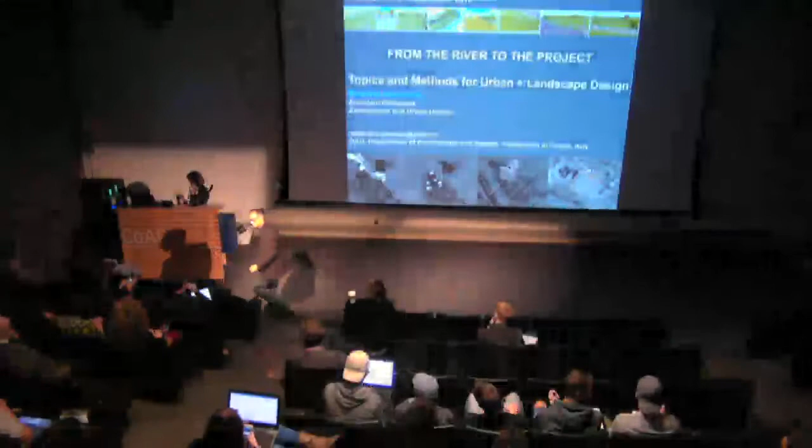So, thank you, Philip. No, he was joking, of course. I'm going to speak in English, but my English is not like yours, so I'm sorry about that. I will do my best, but it's going to be a little bit Italian style.

So he told you who I am and what I'm doing. Actually, in the last years, I'm working a lot on this topic about the riverbanks that I'm going to show you, and also on adaptive reuse and urban design.

I'm going to start with the contemporary issue. It means everybody's now thinking about what quality of living means, urban planning, architecture, recovering the social dimension of the territorial and architectural plans—and not to quote some Americans, but something that you know well, and it's coming back in Europe a lot.

I don't know here, but I'm studying now—I had a scholarship, and I'm studying in Pittsburgh at Carnegie Mellon University about what I saw until now, something very important for you too.

In Italy, because of quality of design, it's probably about how to control quality of design. It's very difficult and complicated because the definition of quality is something that's not possible to define.

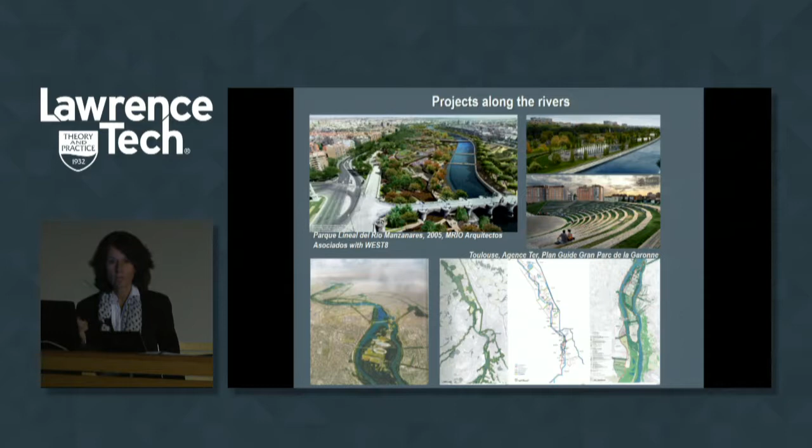One big example has been the park of the Ruhr in Germany, which in Europe is well known. This is a huge project that has been going on for like 20 years, transforming a region that was a huge industrial region. Now it's really improving and is even good for tourism - a lot of tourists are going there, and the landscape has changed a lot.

So the work I've done is in the region Piemonte. Where is the Piemonte region? There's some basic geography here, but I know it's different for you. We are just beside Milano, northwest, beside the River Po, our major river in Italy. Here's some pictures to show you how Torino is.

But Torino, the town itself, now has 900,000 inhabitants. The town, before, with Fiat, reached 1,100,000. But the metropolitan area is now more than 2 million people, and for us metropolitan area means all the small cities that are around Torino. You can see on the map just Torino, but with the metropolitan area.

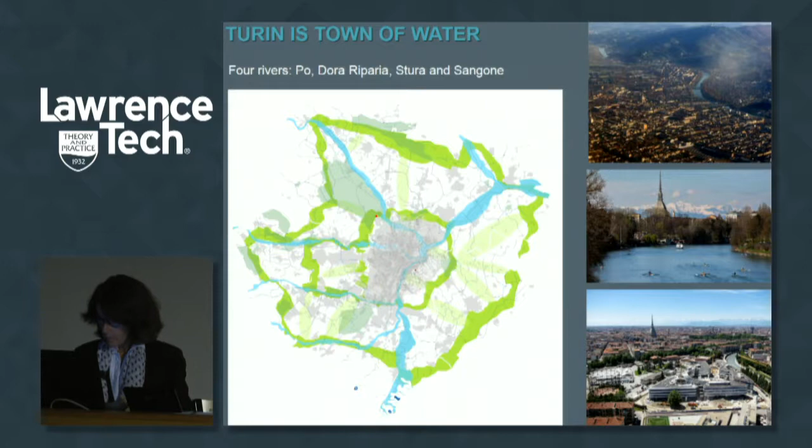This is the green system. What's important in Torino is that we have a whole story, I would say. We have a big system of parks, which you can see in the map, with these wonderful castles that were the king's place to go to hunt during their vacation.

On the top you can see Venaria Reale, which, in the last 20 years—you imagine Torino was considered an industrial town, so nobody cared about the heritage. It was not so important for us. Everybody came from the south of Italy to work.

So the Venaria Reale that you can see now, how is it? It's like not Versailles, but kind of, and it's really big with all the gardens restored and everything—it was abandoned. There was nothing there, nothing, closed. With that, we changed a lot.

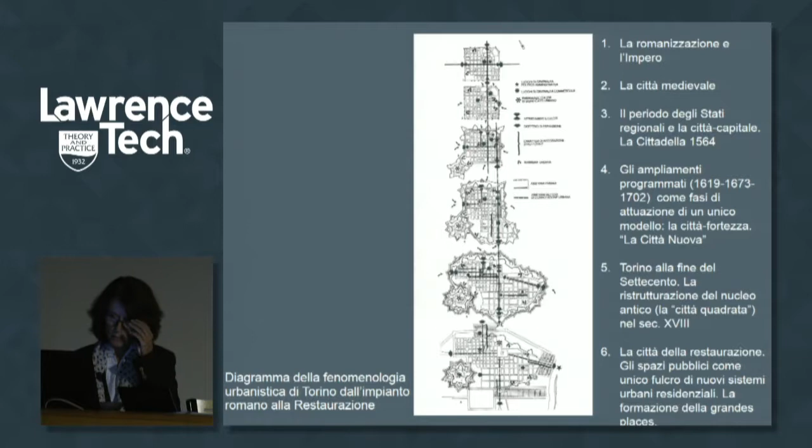The extension was programmed in 1619, and from then until the beginning of the 18th century, this became the new town Turin for the king. The king was the king of Piedmont and Savoy, part of France.

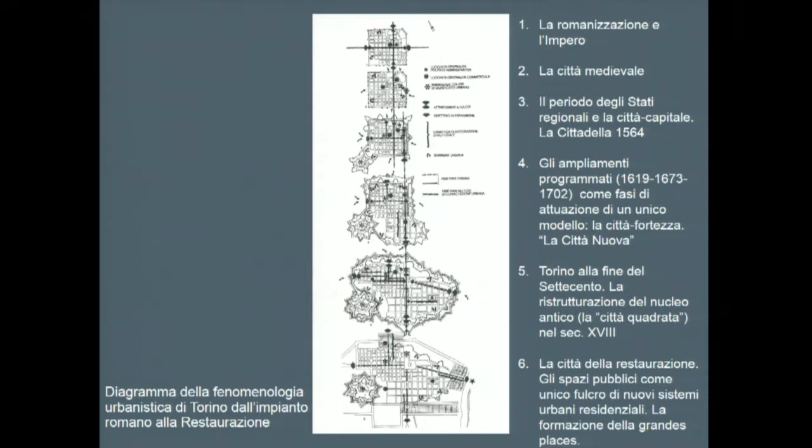But you can see the expansion of the city until the restoration time—that means after Napoleon. Napoleon came to Torino, so he destroyed all the fortifications, of course, like in all the towns in Europe.

This is the Baroque period, in which you can see the relation—the town was very small, and all the parks that you've seen in the other map are now close to the town, but they were far away, in the countryside.

This is an old map, just before Napoleon tore down all the fortifications, just to show the tissue of the city. And this is afterwards, at the end of the 19th century.

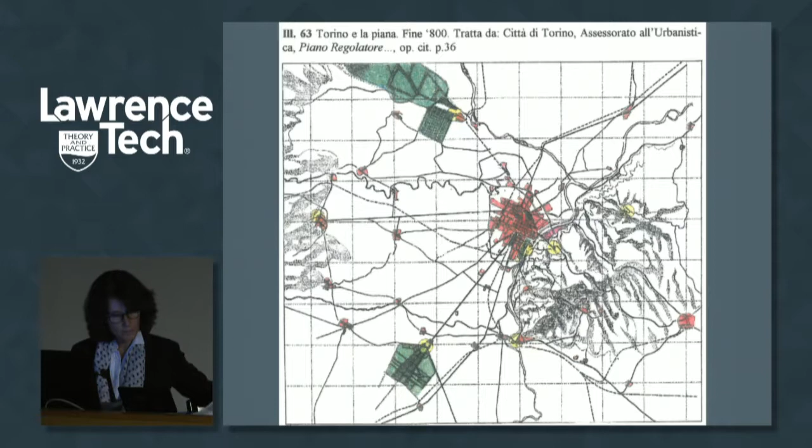Until here, not so many inhabitants, really—there were the nobles in Italy, of course, the monarchy and the king, a very nice town, but the Fiat changed it completely. You see the difference.

In 30 years, the city more than doubled, much more. A lot of industrialization all around the town, really huge—the city almost reached all the parks around.

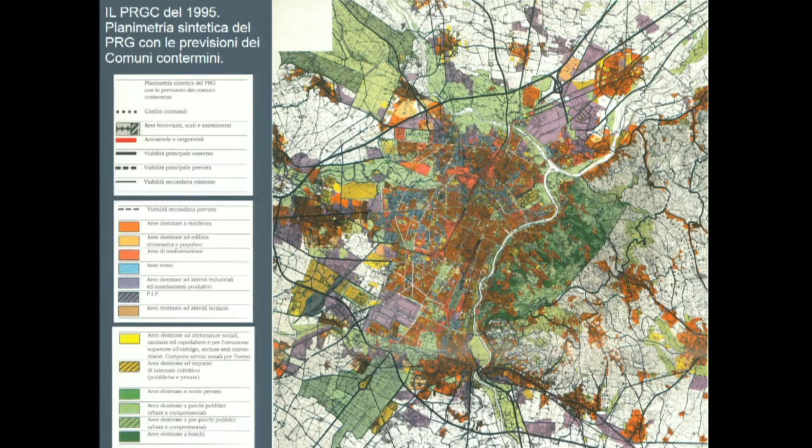Now, this is 1995, our comprehensive plan. In Italy, that's what I noticed here—by state law you're obliged to have a comprehensive plan. Every town has a comprehensive plan, and you have to change it after some years when it becomes old. This is the plan that was done by Gregotti and Cagnardi.

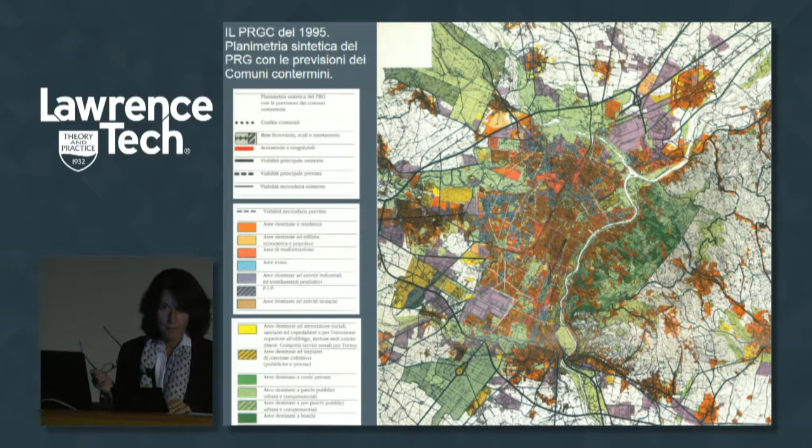Gregotti is known all around the world, especially in China in the last years, because he designed a lot of new towns there and things like that.

The plan means that all parts of the town have zoning. You know what zoning is, I think. But this is just the map seen from very far away; if you go in deep, you have all the land zoned with different zones, and not only that, special documents for each different part of the town for the transformation areas.

Of course, this is an old comprehensive plan. So now, at this moment, we have like 285, I think tomorrow perhaps more, variants of that. But not of all the comprehensive plan, just of part of it.

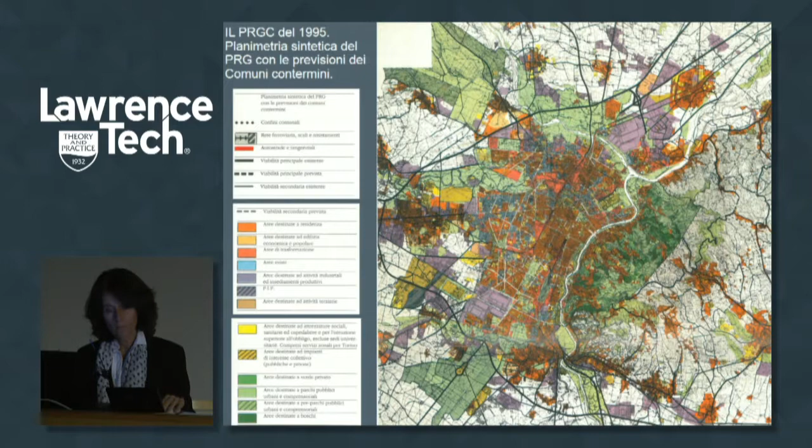This, I think, gives you an idea of where we are. So we were involved in this process of this research that at the beginning I wasn't sure it was so important for architects, but at the end I think it's been something very important.

We started with Sangone and after the Stura. With what? With a river agreement, or contract, if you take this word from France, because in France they have the contrat de rivière, as it's called, which is like a governance tool for shared landscape projects aimed at territorial negotiated governance.

What we did differently: this time there was an architect, not only planners, not only naturalists or things like that. So we tried to do something different.

Of course, this instrument is a tool for strategic water protection, mainly for that. But it was useful because it's a voluntary tool.

So what happened? Along the Sangone, we had 11 municipalities involved, and 2 institutional parks, and a lot of associations that had never been together talking to each other. With this, in a voluntary way, they said okay, let's sit, and we start to discuss.

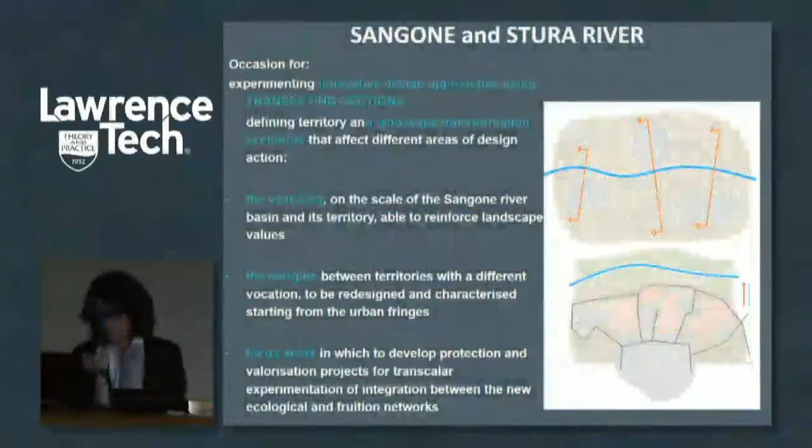And the focus area, that's an instrument—we really focus on some places. Usually when you work on a project studying a river, it's like along the river. No, we try to do something that crosses the river, linking the relation between one side and the other, and also to find some focus areas that were important. You can start with small projects, and after, this can affect a larger area.

So this was an opportunity to study some complex dynamics at landscape, urban, and architectural scale, and of course experimentation with the two scales we already discussed. This is just to explain how complicated it was.

This governance tool was promoted by the province of Turin, which has a provincial territorial plan. So we have a comprehensive plan, and after that, I don't know where it's going—we have a territorial plan at the province scale, but the law changed last year. We don't have provinces anymore. The biggest provinces in Italy were transformed into metropolitan areas, so the borders are not like they were before.

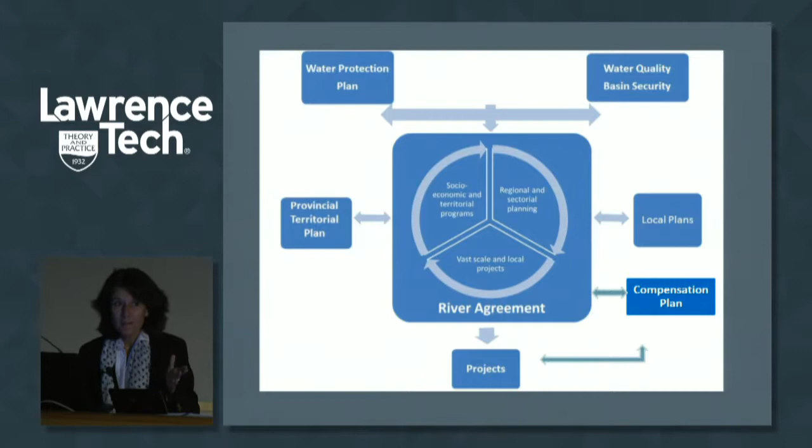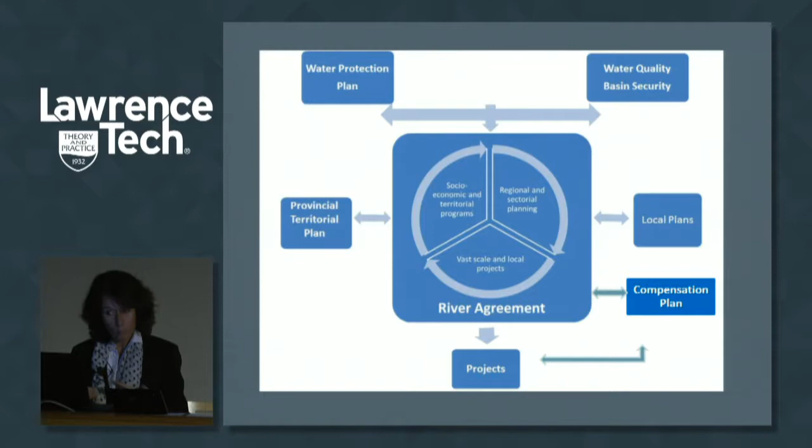I went to Pittsburgh, to the Urban Development Authority, and then to the planning office, but actually they don't talk. Also in your town it's the same. We have this huge system, but nobody sits at the same table. This was important for us, because at the end, now we will see.

So what was the methodology? They said, okay, why don't we do a workshop with the students from last year? But there were not only architects—we had architecture and urban design students. We discussed the terminology with Philip; I know it's architecture and urban design for you, but for us it's still a little bit different.

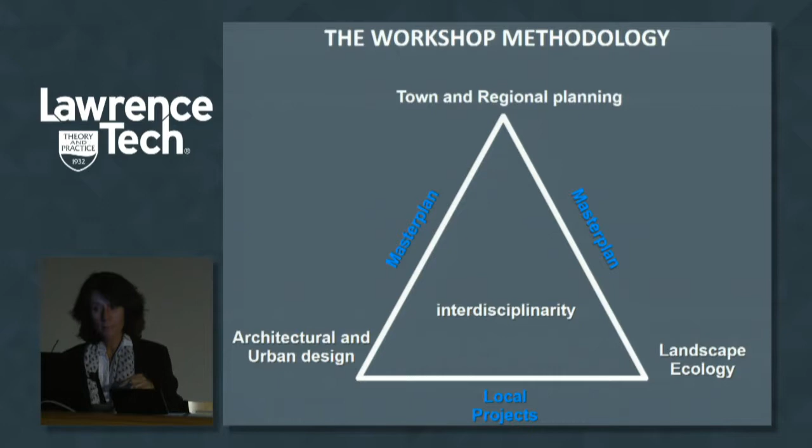We also had students of landscape ecology, and together with town and regional planning, we did this workshop. The tutors were professors—me and my colleague in urban planning from the Politecnico, two professors of ecology from the university, and a tutor from the administrative office.

This is a very strange thing—real interdisciplinarity, not rhetorical, but actually applied. And putting together the idea of a master plan, because of course the planners will say, okay, we'll do a master plan. But it's not something that can be done from above; it's something you discuss with the people.

This was a very long process, two years long—it takes time to talk, even in schools: elementary, middle, high school, discussing about the river, asking what would you like to see here. This is part of how the population participates in the project too.

So these are the results. After the students participated in this workshop, they did a competition and received a prize from the province of Turin. With that, they got free bus travel for one year all around the town, and the publication for last year's students was very good.

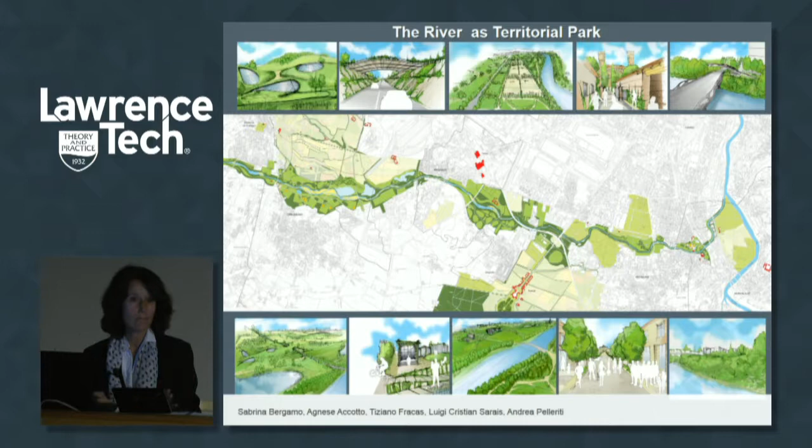Public transport free—for us, our public transport is great. We have trains and buses, and now we also have the underground in Torino, so you can go around; you don't need a car. This is completely different. This is the first one.

You see all the views they've done and things like that. Now I'll just show some of them, and you can see the difference because there were ecologists—ecological students studying different subjects. This farm system, they studied it as a park linked together.

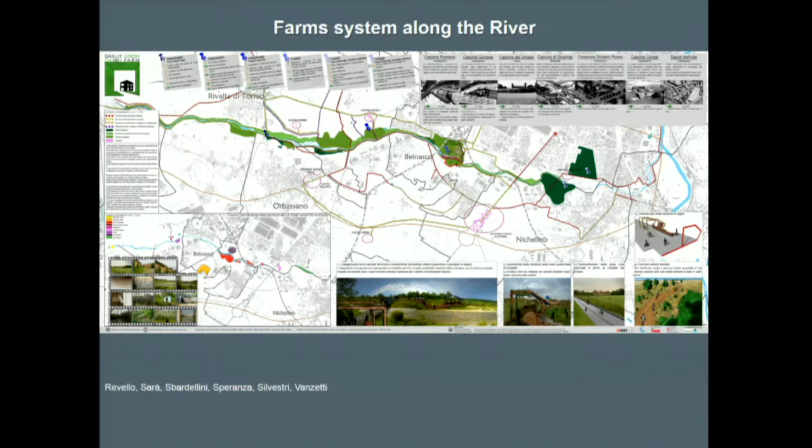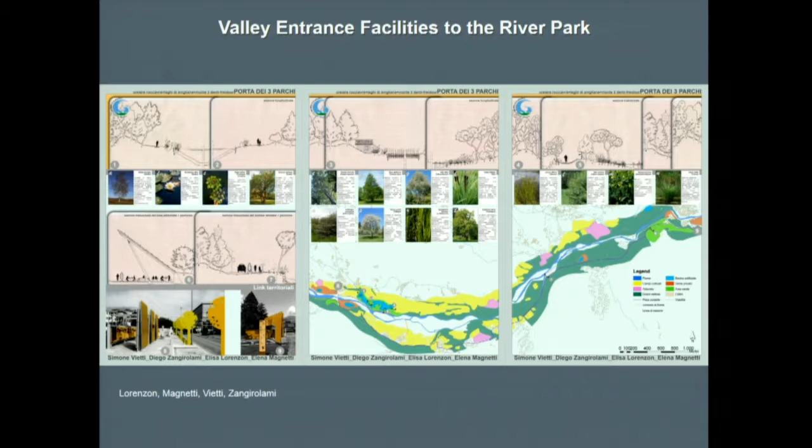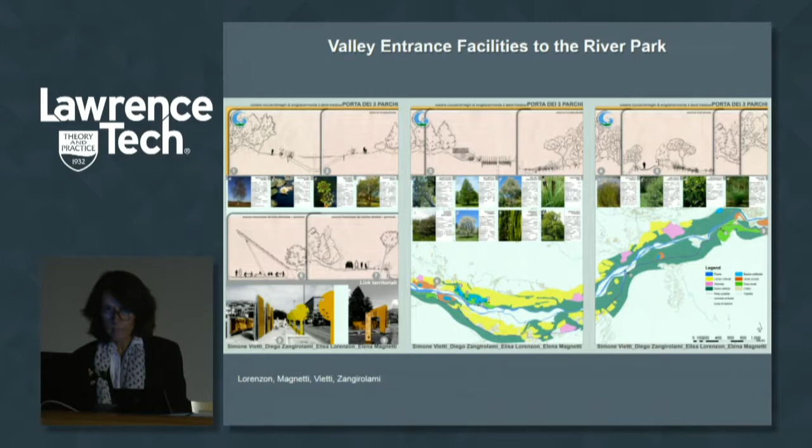Ecological network and settlements, valley entrance - that means you're entering the valley. This is a community with a different way of acting with the land, with the buildings, with everything.

These were more architects, so they studied typological studies, margins projects, boundaries, and how to relate the town in the last part of the river. We have to keep these boundaries, or the fact that permeability is now much more important, and regulate it with guidelines for the project.

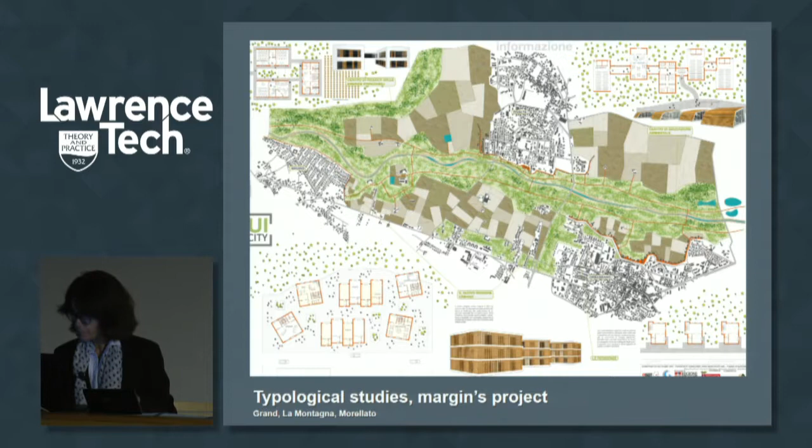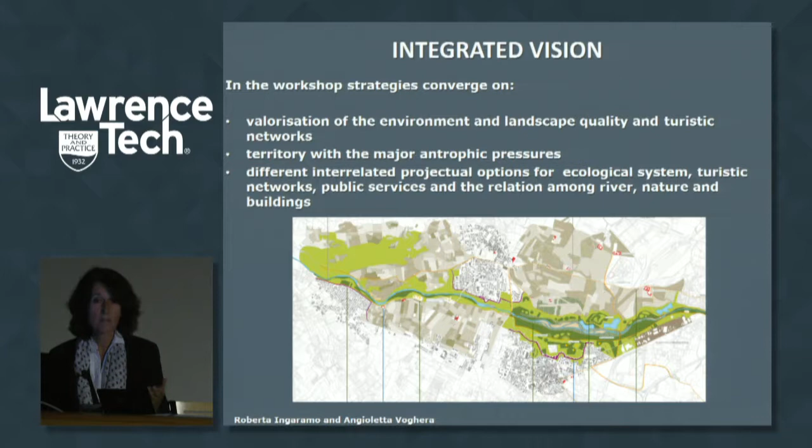So at the end they asked me and my colleague to do a master plan, kind of professional work between university and professional work. They said, now we have some ideas but don't know how to put it all together. Things like that take our office 1 to 2 years, but we did this in 2 months. We worked a lot, but it was really useful because just 3 months after we finished, this is part of the master plan.

This plan was about 20 meters long, because the river is really long. It looks like a drawing, but it's 20 meters long with all the details inside. What we did was not to say it's finished, but to say what is done and what can be done in the future - an open discussion.

When we finished that, some of the small towns around the river received huge financial aid from the European community for another project that had been going on for 10 years, called Corona Verde - a green boundary around Torino. They wanted an inquiry answered in just 3 months.

The question was: okay, who has a project, who wants the money? The small towns near the valley had a project and were surprised. There's one mayor of this town who now, when he calls me, treats me like I saved him - they had so much money they never saw in their life.

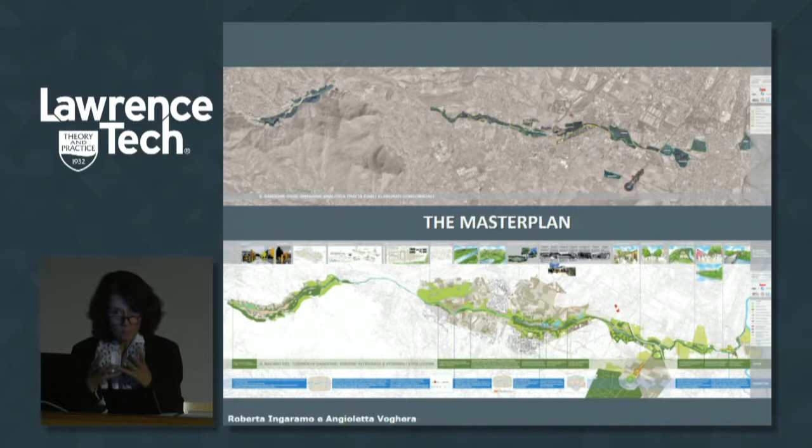Other towns in another part of the Torino landscape asked for the money but didn't have any project - they wrote some concepts but nobody understood them, and that's what happened. It wasn't huge, but for them it was important - this is just the implication of the work.

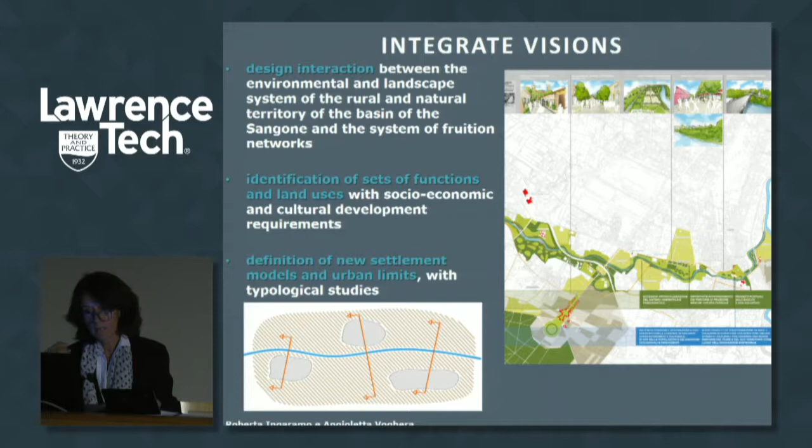So we integrated the vision, design interaction, identification of sets and function and land use, definition of new settlement models and urban limits, defining a complex strategy of end projects.

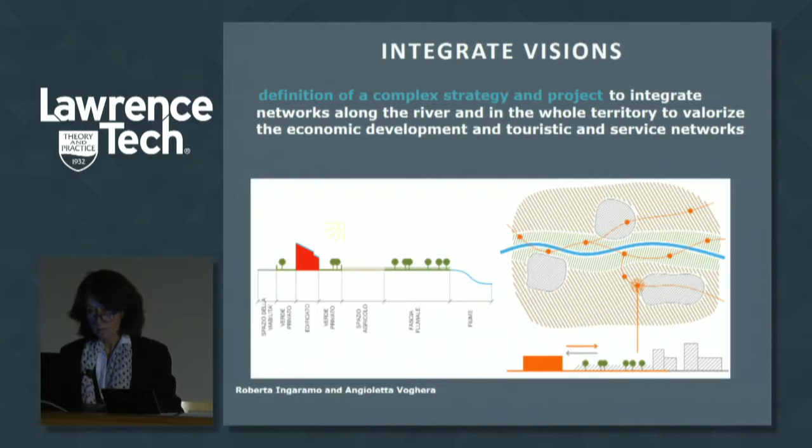This is a question of how the strategy is much more important. So what we use is this integrated multi-scale project - it sounds good for us - based on integration between the disciplines of architecture, urban design, and planning. Not the planner on one side and the architects on the other, but together we try to do that.

With no scale limits, the scales are connected so we can apply to extensive areas, and we try to overcome the hierarchical vision of planning and urban and architectural design - where first you plan and after the architects arrive. No, it's not like that. It doesn't work, because if the planner does the plan without thinking about the architecture, it's going wrong - the process is wrong.

Another thing we tested in different teaching and professional experience - I'll show fast because time is passing - was to consider buildings and voids, rural areas, public and green space, and private open space on the same hierarchical level. It's not only architecture first.

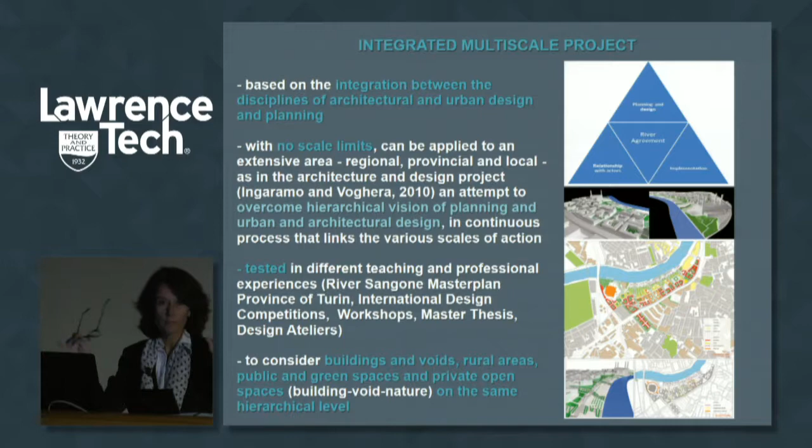We are the architects and we do our part, and the rest, I don't care about it - but what I noticed in Pittsburgh is you do a project, and after you just do a little bit around, and then the street, who cares? Here in Detroit, today I went around and I'm really surprised - I knew already, but to see it is different. You have so much land that it's going to be hard for you, and I don't know what you're going to do - it's really very difficult.

So it's a participatory process. Public spaces design is the connecting element - it's very important.

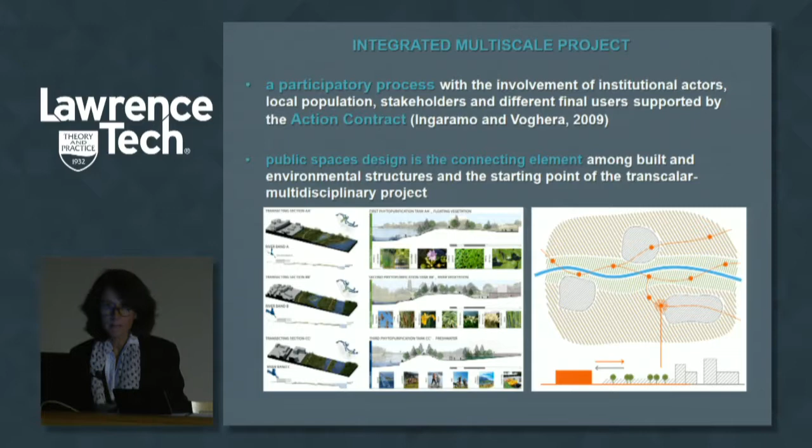So we use two tools: the action contract and a participatory planning instrument useful for supporting the public and private decision-making consultation process. We put together not only the public but also the private sector. We discuss together and try to do a contract between us that is voluntary, of course. It's not prescriptive, but it says something. The transecting section is like a tool, really operational, used to correlate various elements, also because people who are not in the field have to understand.

This is a bit of a re-examination of experiments like Patrick Geddes's valley section and transect planning, different of course, completely, but I put that just to suggest you where it's coming from, which literature.

So the transecting section technique is like revisiting the role of the project rendering system. You see not only the buildings, you see all the land, the section, and the relation between the parts, offering an instrument of support and verification, enabling discussion also for a non-expert. They see how it was before and how it can be. You can change things, discuss and change.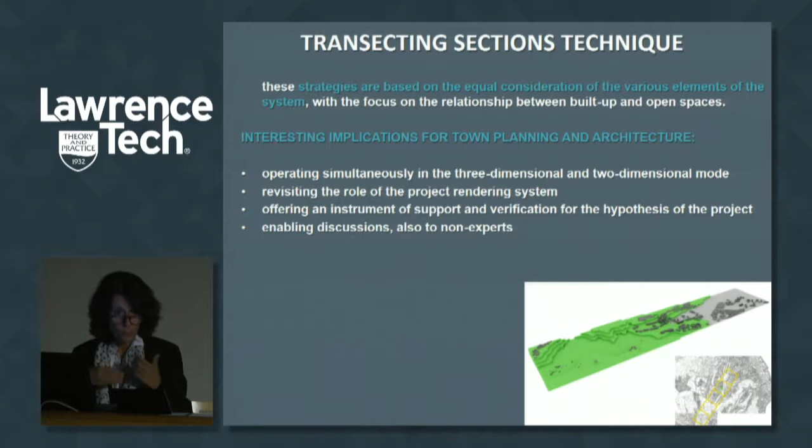So the method, now I'll show you, because I think time is passing fast, some experimentation. This is an ASP project, meaning a special school between Politecnico di Milano and Politecnico di Torino, in which we have 90 students applying each year, and they are the best — they have to have really high marks to get in, from engineering and architecture. This engineering includes economics engineering and all this stuff, architecture, design, landscape, together they do special projects.

There's some experimentation along that — they did different things, like experimenting on evaluation, and also waste treatment. So they try assessing the sustainability of the projects, or waste treatment, or valorization platform. I know for you the term valorization is not useful, but it means adding value for us. All these courses are in English, the teachers are in English, they come from abroad, and they do projects and courses.

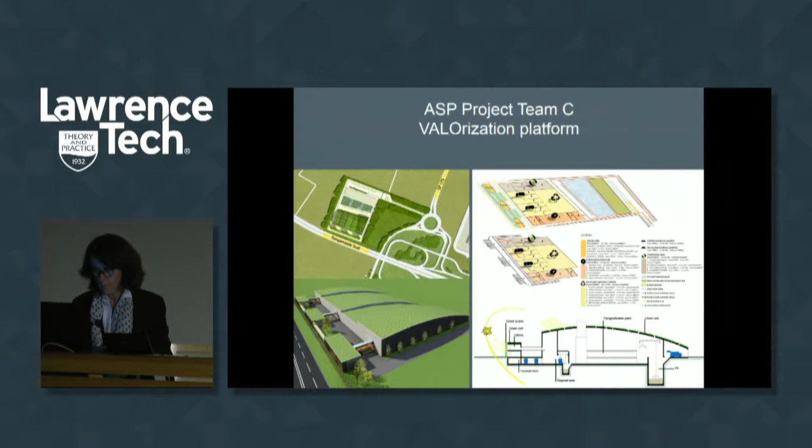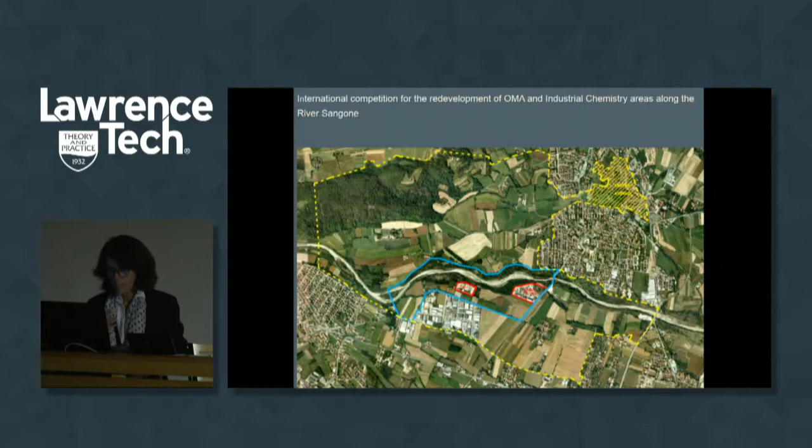It's very interesting, this is another thing — an international competition. We participated, myself and my colleague, just because it was on our topic. These are the drawings for the competition that the administration gave us. It's a really huge area along the Sangone River with industrial sites and agricultural land that hasn't lost its value over time.

This is much more technical — these are the drawings, we won the prize for that. Of course the money was just for the cleanup of the area, so they start from that, but perhaps in the years they're going to do more.

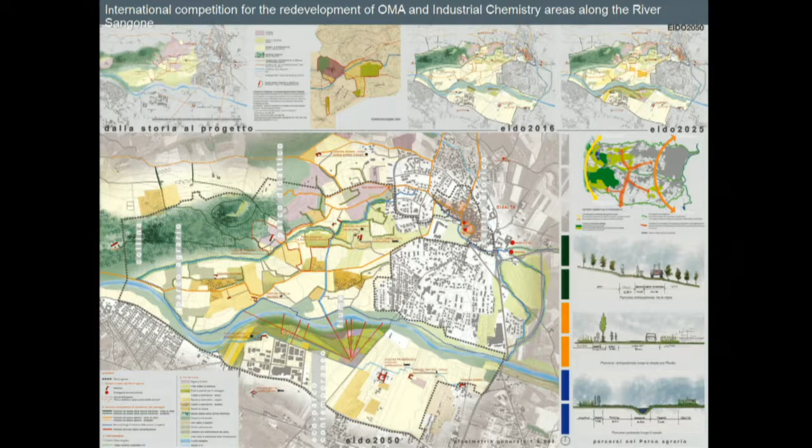What we did here is this project called EIDO 2050 — EIDO in Greek, meaning the vision of 2050. Different phases of how to transform, starting from the history, recovering this huge territory, one in the north with the agricultural park. I discussed with Philip about the term — yes, it's a park in which there is agriculture, but with administrative boundaries, with special definition and perhaps tax.

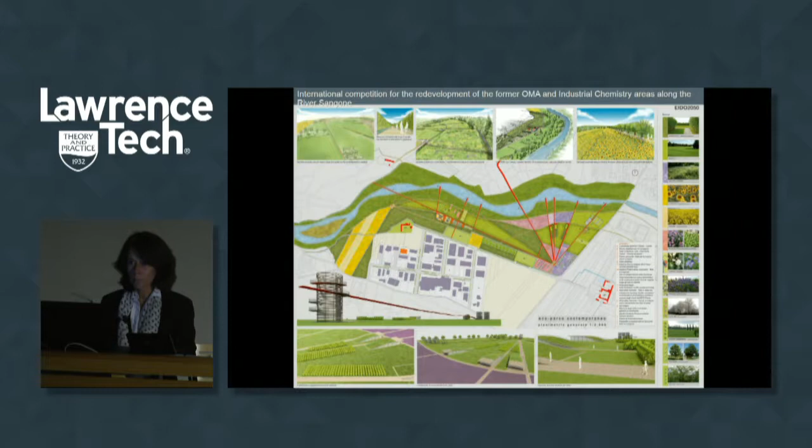How you say that, discounts, things like that. And on the south, not another park, because it's too much — we can't do a park all over, but we put a new eco park. It means the industrial site renewed not with gardens, but cultivation for energy that can be used for energy. We also put new industry in the existing industrial site, you can see in red on the plan, where you treat these things, becoming also an educational function. These are the concepts of the project, and it was very good — few money, so that's what happened.

These are a lot of workshops we've done with the students, outside and inside the university, because a lot of towns and small cities ask us to discuss this topic. This is important for me, it's related with the thing — so really we arrived at architecture.

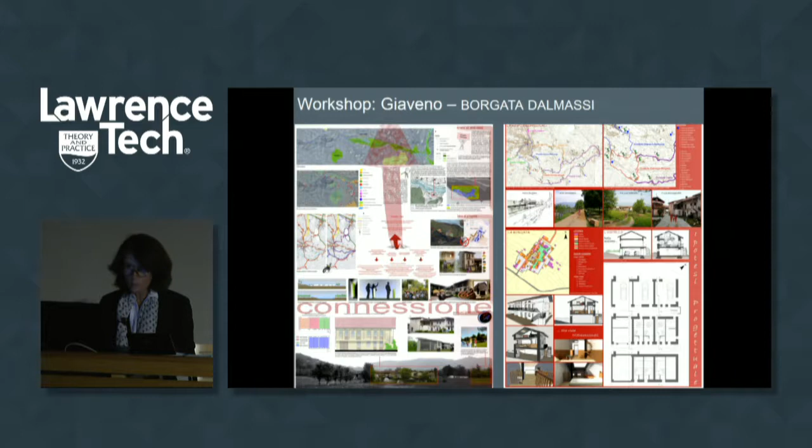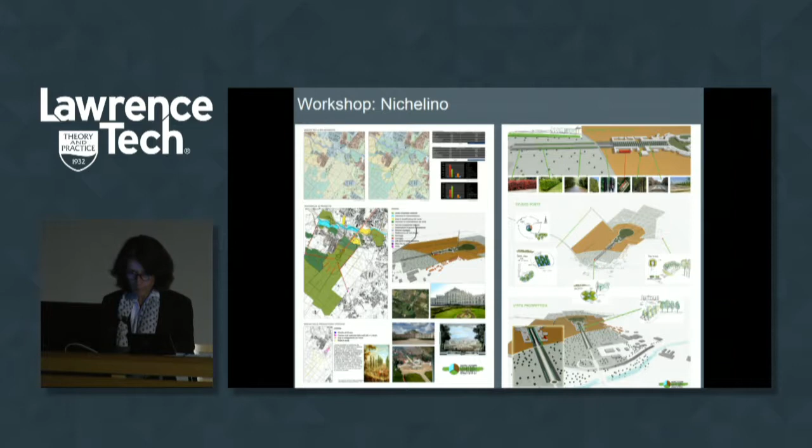For example, this is a small town — they wanted to do what's called in Italy an 'albergo diffuso,' a hotel in small houses, like reuse of old buildings to put bed and breakfast and things like that. Or an old building that the administration owns but doesn't know what to do with inside. Or near Stupinigi Castle, where they didn't know how to use the land or how to enter the castle, and so the agricultural system and the boundaries of a small town beside it.

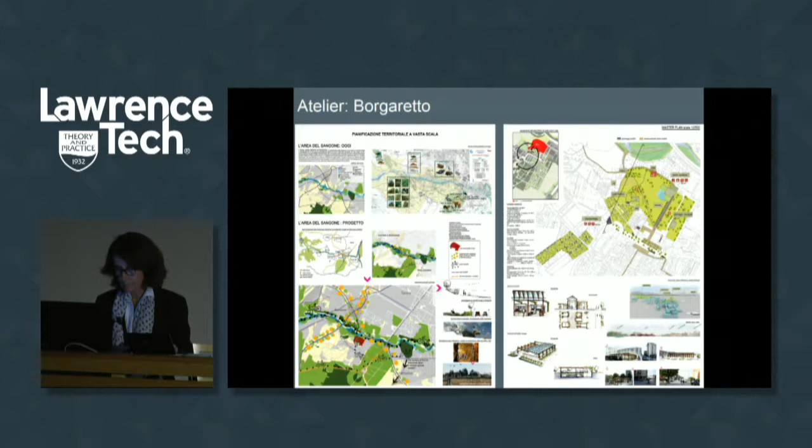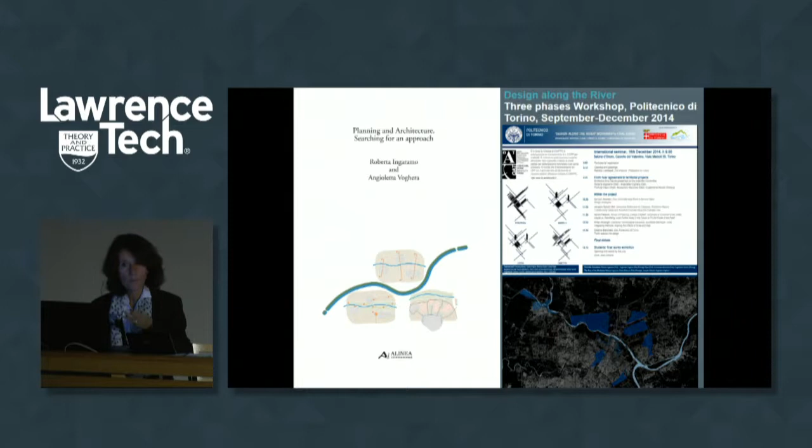So all these things, we made a book. And afterward, we continued in another experience in the Stura, in the north of Italy. We did a new international workshop. We did some conferences. Philip came also to discuss; he was in the jury of the project. And you see the difference.

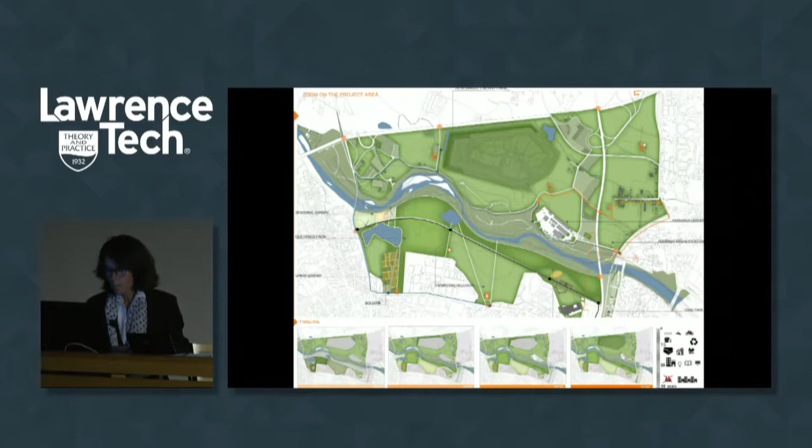In the north, up, you can see the master plan for the Sangone. Up, we didn't really do a master plan since they didn't ask us, so we did parts of the projects, mostly working on the urban part of the river, but also on the mountains where the river comes from. These are students' thesis projects. They worked on that, so you see the timeline, the different phases. These are long processes, of course you can't do it in 10 years, it's impossible. But these are all the master plans, the big ones, in different versions.

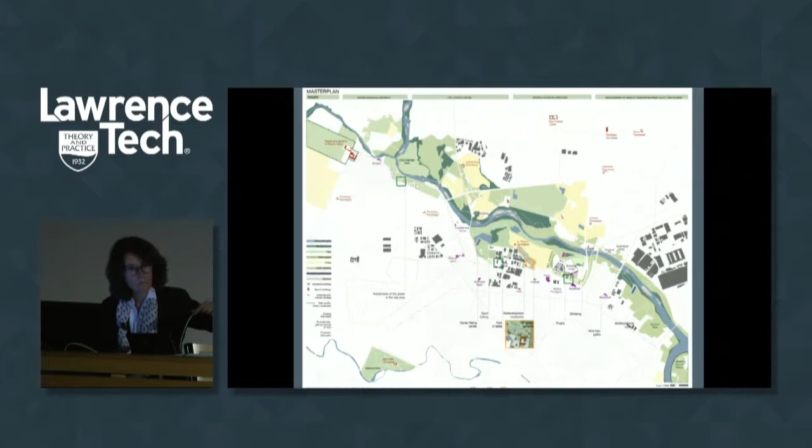I show you this because I don't know how much time I have left, so I prefer to go faster, and after, if you want, we can look more.

In this group, for example, there were a lot of planners and engineers also of the environmental kind - environmental engineers, much more than civil or landscape. So we decided to do something different.

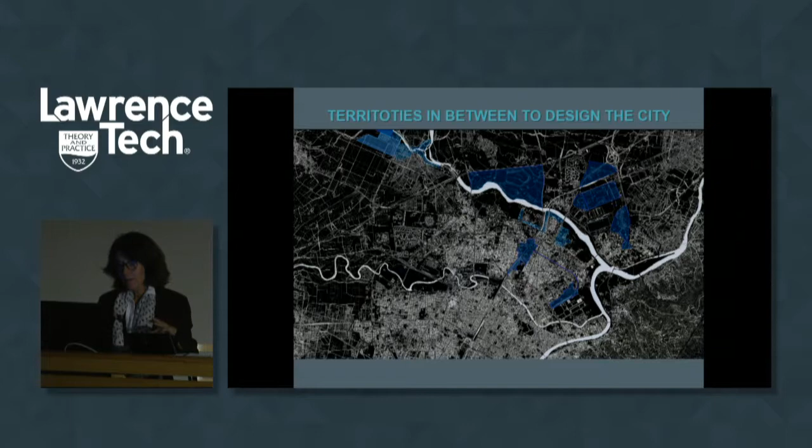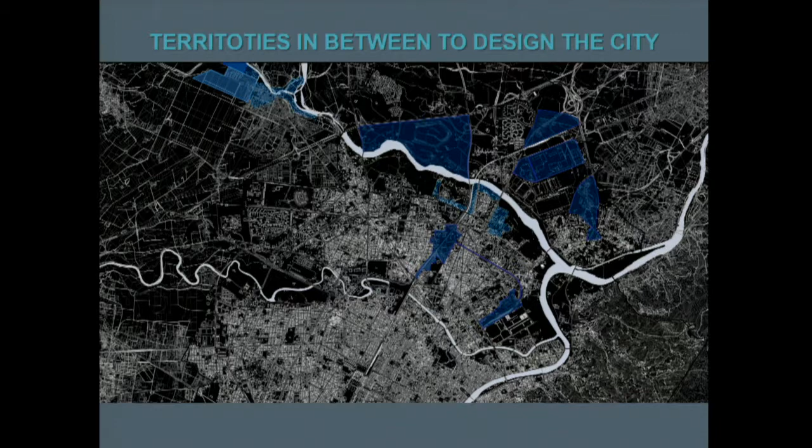In the blue, you see all the main transformation areas of Torino. We didn't work on that; we worked in the other parts, because all these transformation areas are not going on - they're stopped, they don't have money to continue. There are huge transformations, for example this is called Variante 200, meaning variant 200 of the general plan you've seen before, in which there's a new underground line, a lot of buildings. It's been years, but it's still not going on.

So we tried to develop design strategies to find out how we can work with this - actions that trigger immediate regeneration, a transformation process, not something that's going to take 30 years. Starting from smaller actions, like Detroit we saw today, where perhaps now some parts are changing just because of a restaurant. One restaurant, then 2, then 3, then 4 - a small project can sometimes be much more useful than general projects.

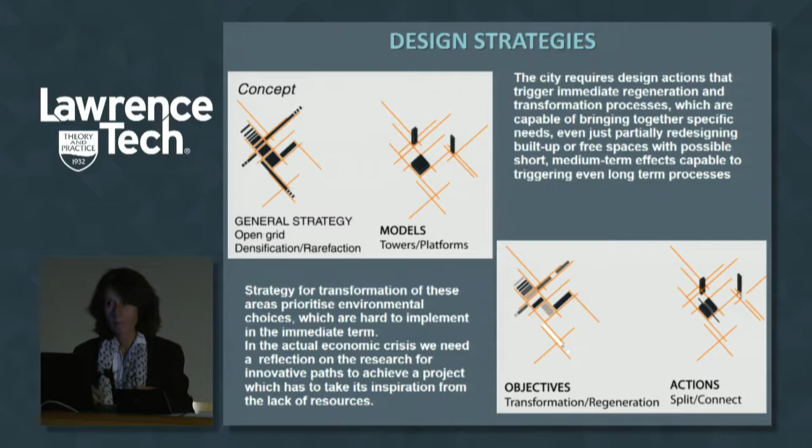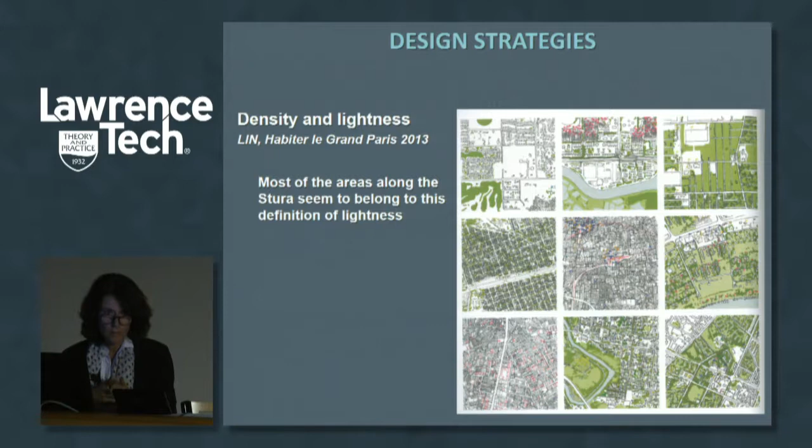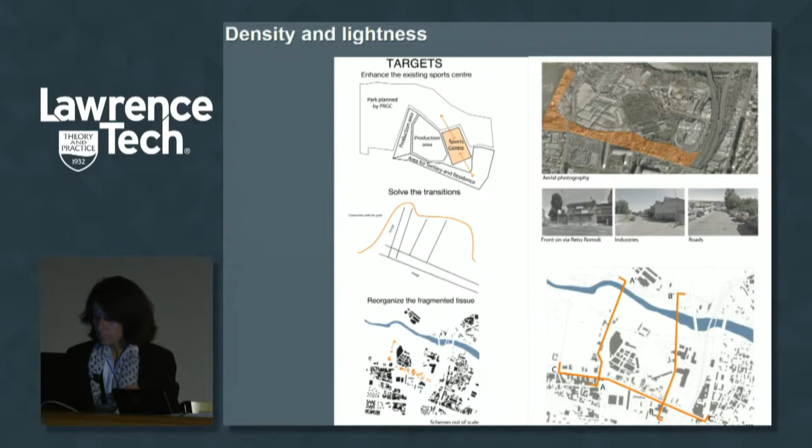So these are some of the projects. We also worked on the borders of this part of the city, which is much more similar to yours, with industrial storage and huge commercial buildings, with a few residential buildings built beside the commercial ones. So we tried to think about what to do with that.

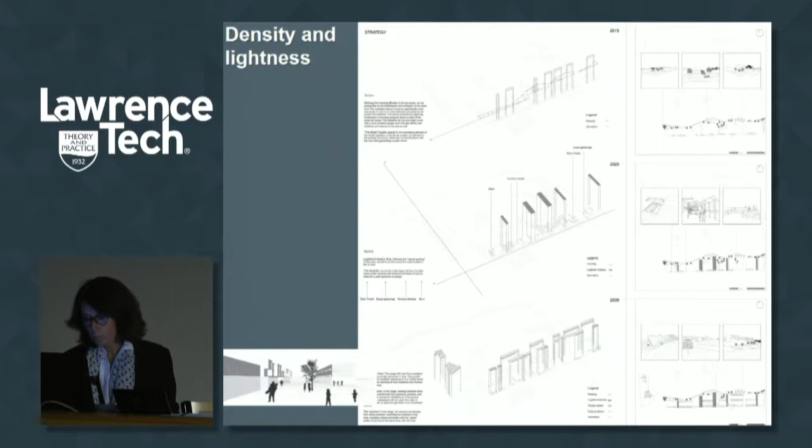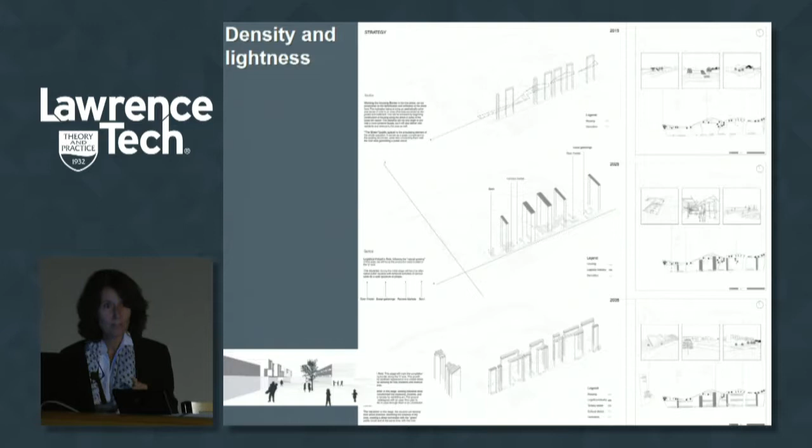With different phases, we started to work with the logistics industries and kind of technological clusters. At this time, the Polytechnic of Torino is now in the top 50 in the international ranking, in the world, becoming really better. In some subjects, for example mechanical engineering, we are really in the top 10 in the world. Architecture, we're in the top 50. We're getting better - we're just fighting with Milano, which is better than us, but that's a political question, I think.

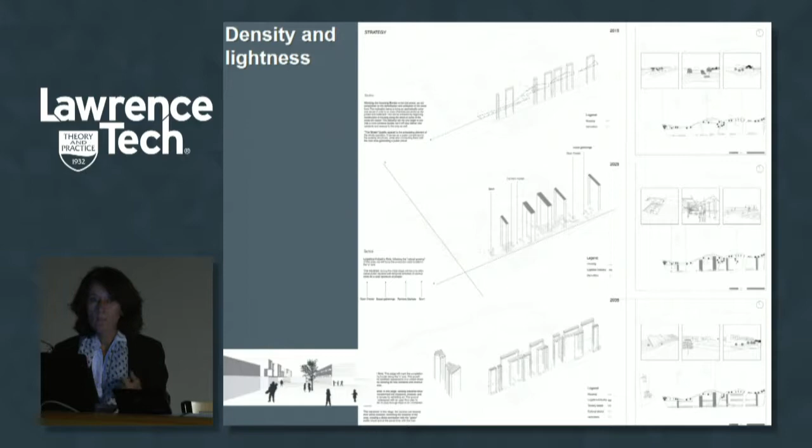I think in the future research universities... Italy we're going from our system to kind of your system, so some universities are going to be research universities and others teaching, like yours. Research universities in Italy will be really few, like Politecnici in the north, Rome La Sapienza. Venice is strange because it's a really cultural place, but not very good in the ranking, though the professors are really good and we work together. The north part of Italy is a huge university system, kind of.

Links and integration is another topic we work on, how to integrate the town, especially when you enter. This, for example, is one of the main entrances from the highway, where you go down and enter Torino from Milano. With the fast train it's now 1 hour, but in 2 years it's going to be 45 minutes from the center of Torino to the center of Milano. You can live in Torino and work in Milano. This is going to change a lot of things. Already now it's like that, we have people from Milano coming to Torino, and this works a lot.

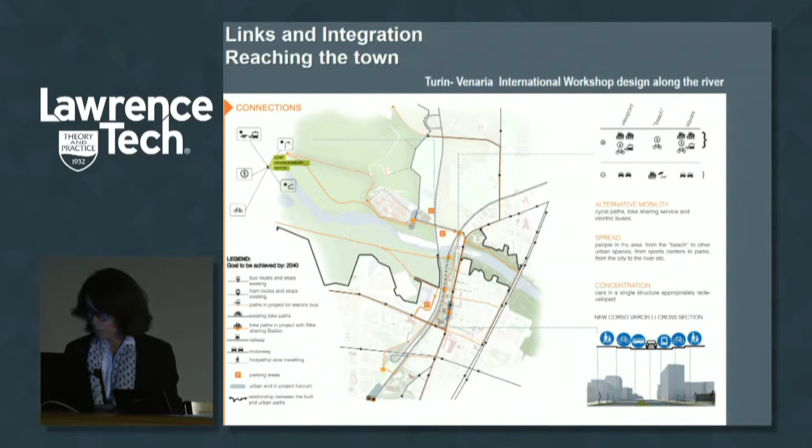So we decided to experiment with some typological issues, where you can see small production, light manufacturing, and public spaces - not places where you work in the day and it's closed at night, but places where different times of day have different activities. This is very important, because places that are closed at night can become a cluster completely separate from the town. In Europe, towns are alive, and we have a lot of students, growing, and this is really important.

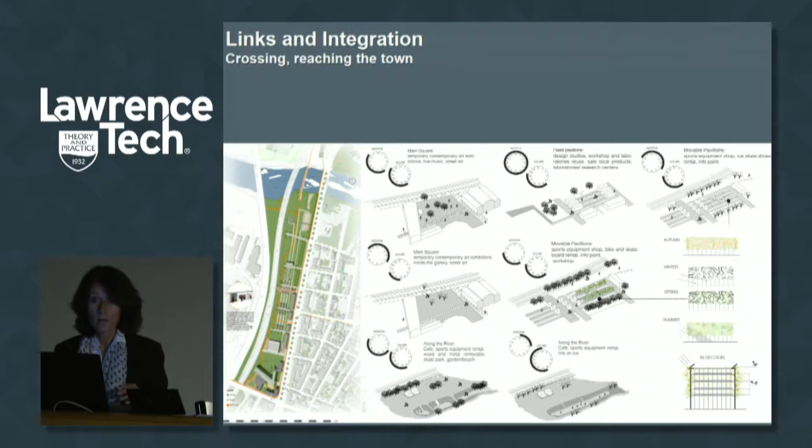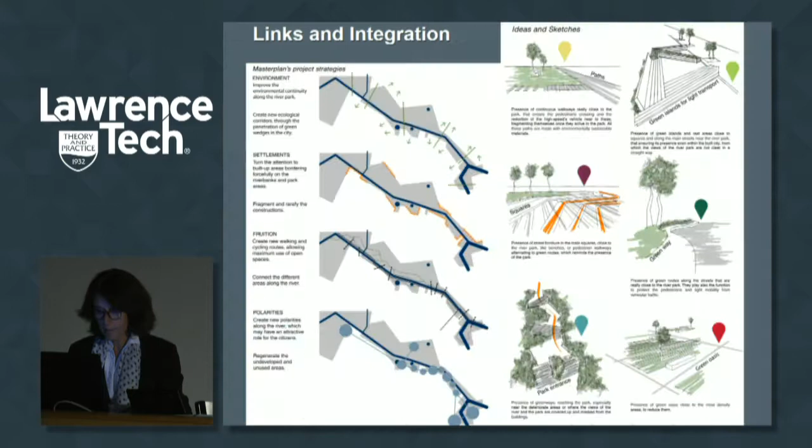We need a lot of laboratories and places to start startups. We have a big incubator in Politecnico di Torino that is not like Carnegie Mellon because we're specialized in other things, but we have like 20 new startups each year, and some of them grow and go out from the incubator and become activities. They need space. These are the links, just to show you some links and integration.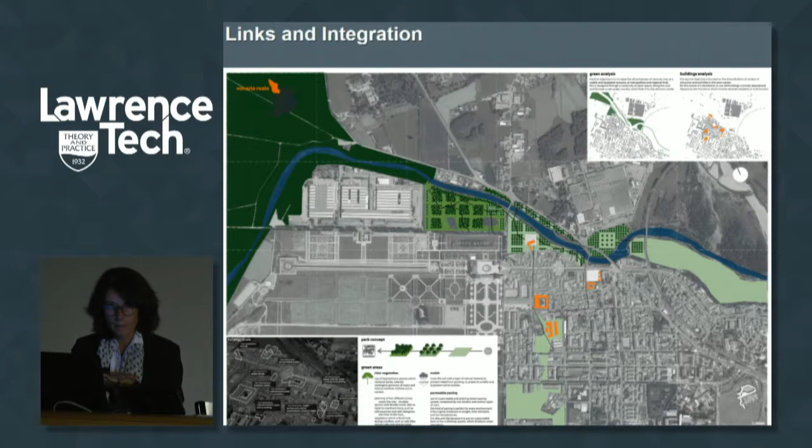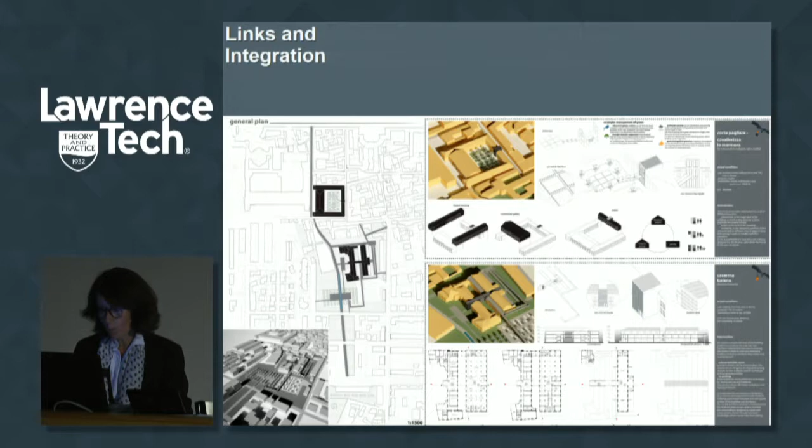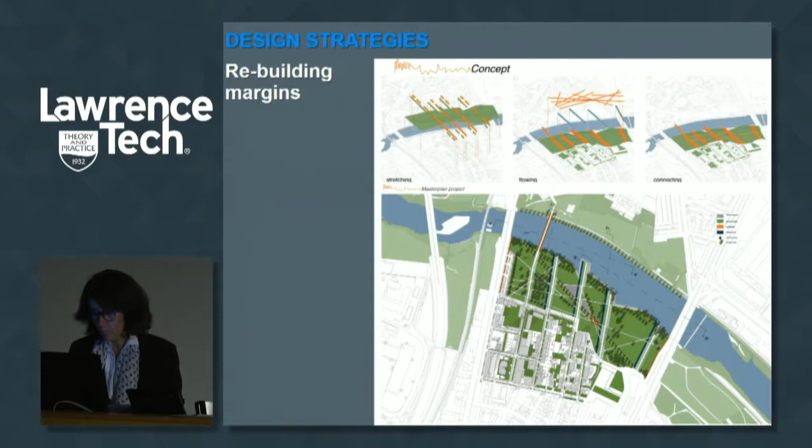The park system is in Venaria Reale. You know what happened there? They were so crazy that they put Magneti Marelli, a big huge industry, right beside the castle, as you see in the map. Now it's difficult to say, you go away - it's not possible, it's very difficult. But in the future the idea is there's not going to be an industry there anymore, because it's going to change. So how to draw this system, with the green system going inside the town to link the public spaces and public buildings that have to be renewed and reused in different ways. The park can be only park, or can be used with the buildings. This is an industrial site, not really industrial, more like storage and small industry, and you see the transformation.

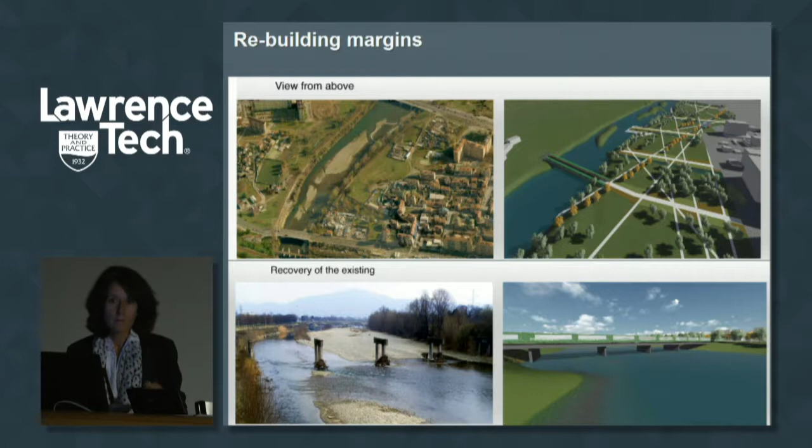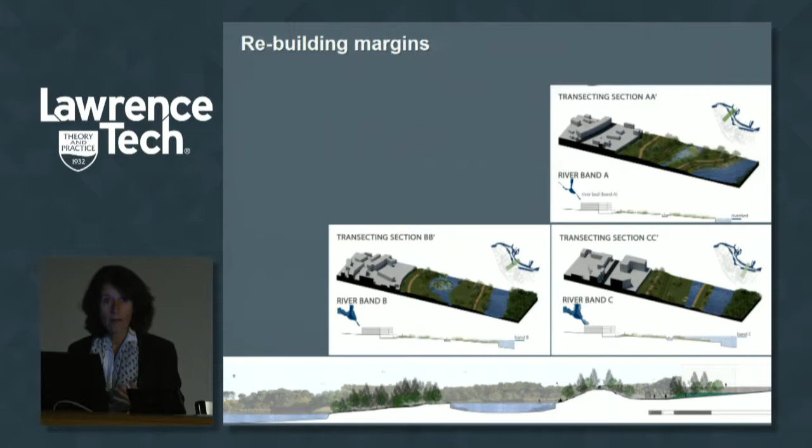You see there's a stream, and the stream changes in different months of the year. So the dimension and also the water - they've overflowed a lot in the last 10 years, twice. This is also a really ecological problem, and we have this all around Italy. We don't have only earthquakes, which is another big problem, but we have this overflowing of rivers, for example in Genova, in the Liguria area, every year. This is because we've also built up on the rivers and streams and didn't have enough space. It's not like here, but this is something that has to change.

These are some examples of rebuilding margins, also different ways of living. Now, especially young people - I hope you do too - want to live in a place that's dynamic, where you can work and live. You say work, live, and play here in the States, but it's not so different from what we want, and we need to talk about that and try. So here we try to put some residential area inside this storage or huge building, which can also be open space for arts or performance and different things, or small startups with small building sites.

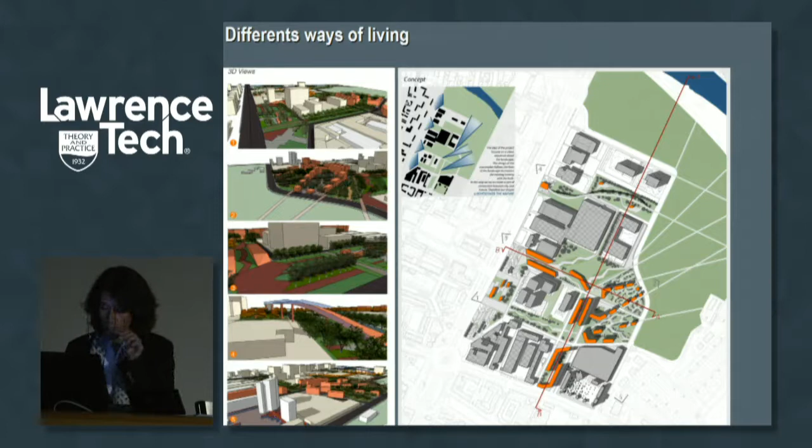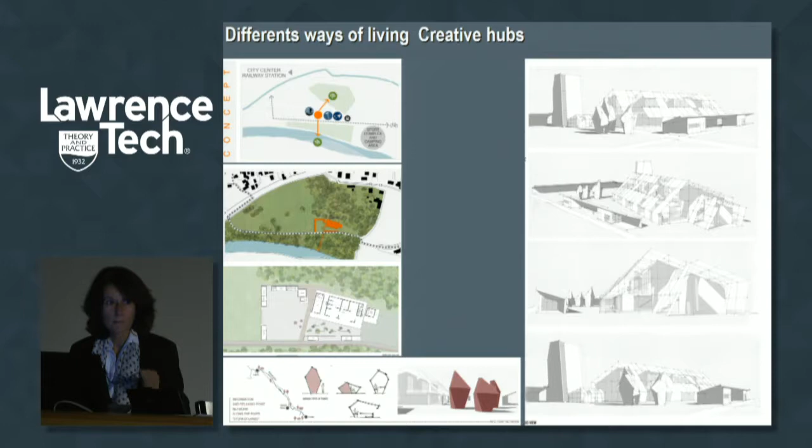This, for example, is a creative hub that they designed for the valley, where you can find all the information, but you can also control the landscape quality and study how to control it. So you can put all these things together, not only restaurants and bars, but exhibitions and everything integrated.

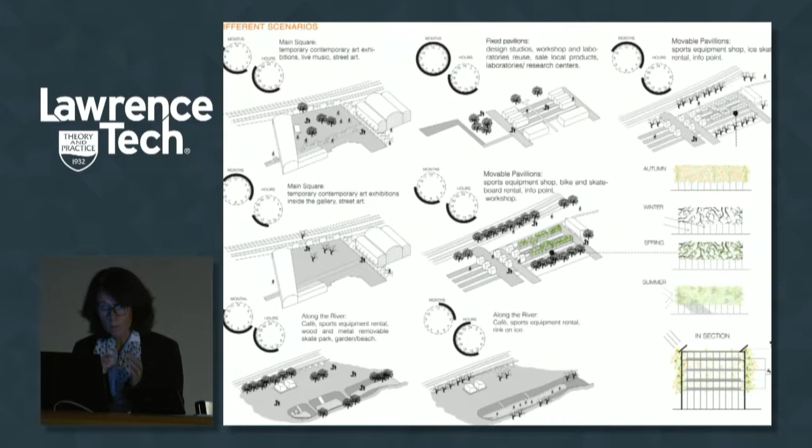Also with new technologies, but in a way that is related to the context. So what I showed you are different scenarios of industrial sites, small or production with a square, and you have a pavilion that can change during the year, during the months, and even during the hours of the day.

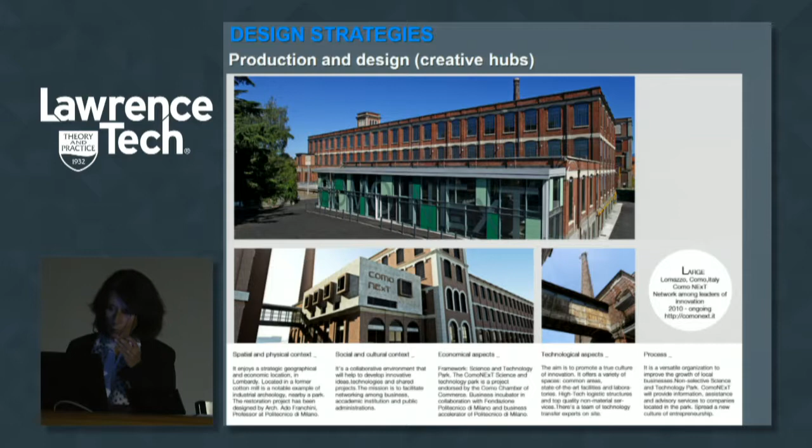Just to show you, we have a lot of adaptive reuse of industrial buildings, and now they're becoming co-working spaces. This is really famous now in Italy, even too much—everybody goes there, it's very co-working and very cool. Production and design, so new buildings with small technological elements that you can throw away when things change, because time moves so fast, and you have to change how you use the space, not keep the same use.

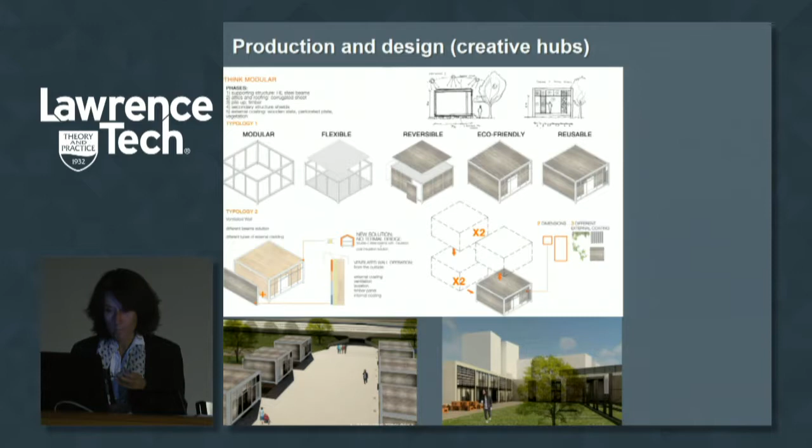These are the examples, I'm almost finished. Sorry about my language, but so, what is design?

For us, it's a tool within the decision-making process for selecting elements and values, for developing and explaining community vision for a new urban and territorial quality of life. This can make things clear and explain to local actors, but also to non-experts, and contribute to empowerment and governance for the community. It's also an effective tool for taking action in place, especially in our situation where we have a big crisis, to define future context or future vision for the territory, and to enhance resources that are sometimes not considered.

To conclude, I'll just put some lessons learned that I wrote in my last book, coming out this autumn with Springer, in which I thank Philip—he contributed an article there—and we have international papers related to the subject. So I'll just say a few words about that.

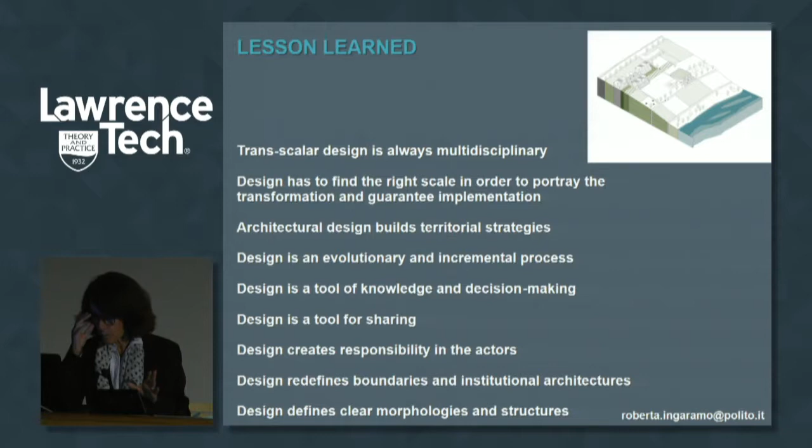Also, design is an evolutionary and incremental process. This is clear, it's not impossible—it's something that, especially now, is difficult to define forever. What we say can be very changeable. Today it's okay; in five years, even in one year, it's possible that this huge building was a store before, and now we're putting something like arts and crafts, or tomorrow we could make it a place to sell vegetables.

Or an architect's office—you know, we need a lot of architect offices, that's all. It's always one solution for us in Italy. Perhaps not for you, but for us, architects get put in the place where nobody wants to stay. Design, no, it's always like that.

Like today I saw the huge plant here, remember? Yeah, exactly, and what was it? Here, there are some architects—I say, this is right. Or musicians, or artists, and this is cool. And people start to think about how to do, what to do with this place.

And is the tool of knowledge and decision making. This is clear, we have talked already about heuristic and explorative, interpretative, and transformative. Design is a tool for sharing.

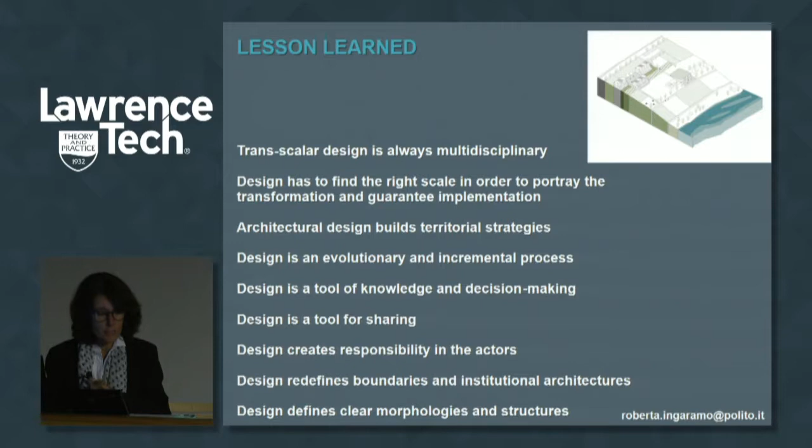Design defines clear morphologies and structures. That's more for us, for architects. We have to be clear, not to just say we're gonna do something like that. No, we need to define singular, clear morphological design that is important to relate to other parts of the scale, the large scale.

And I think the design of in-between spaces is strategic, in that it is the place for dialogical reconfiguration of the different elements and spatial system. Of course, these are not absolute considerations. They draw a framework in which research related to design attempts to build the physical transformation of the place where we live.

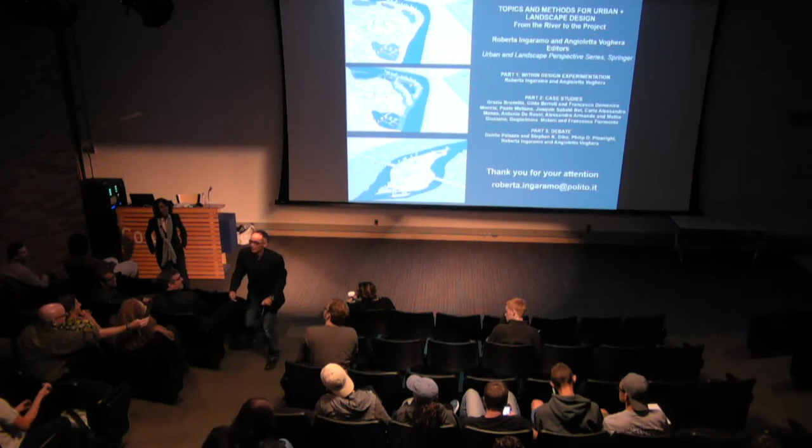No, not at all. Help me. No, help me, because I didn't understand exactly. No, you're good, thank you. Thank you very much. Okay.